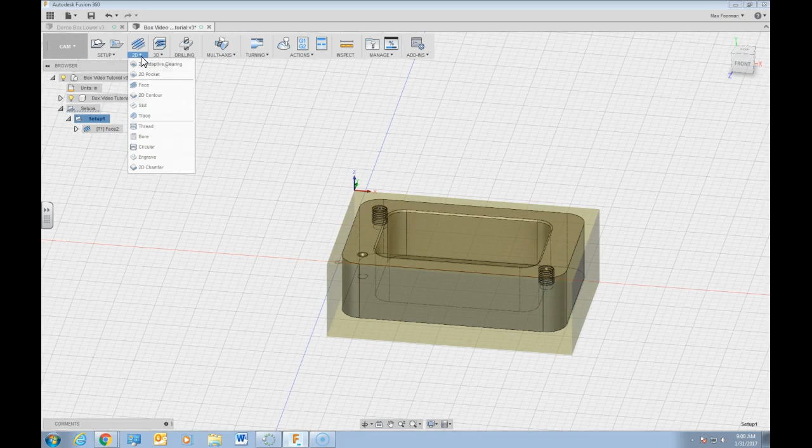Alright, now we have created a facing toolpath, and you'll notice that it showed up here underneath the setup. We're now going to start removing more material away from this part.

So we're going to do a 2D adaptive clearing, and this is what's called, or intended to be, a roughing cycle. It's just focused on getting as much material off of the part as possible in the least amount of time, not necessarily in how nicely it does it.

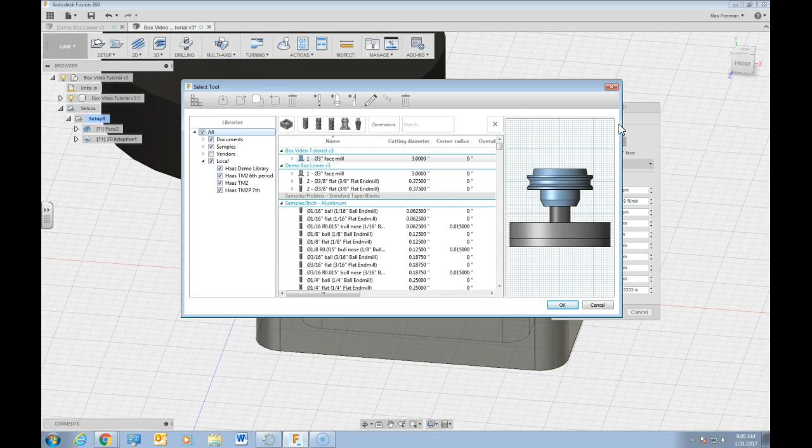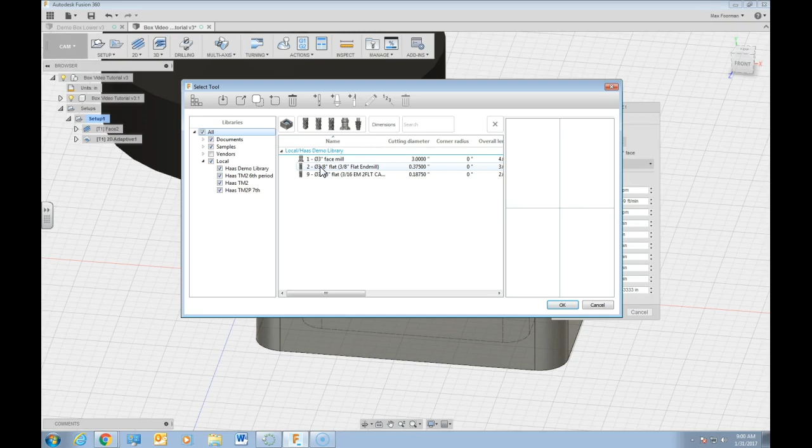So what I did there was click on the tool selection, because the 3-inch face mill we used in the last operation isn't right for this. We want to select, coming into the tool library I had set up before, this 3/8 inch diameter flat end mill. Clicking on that, say OK. Notice that some of these values changed that were tied directly to the tool.

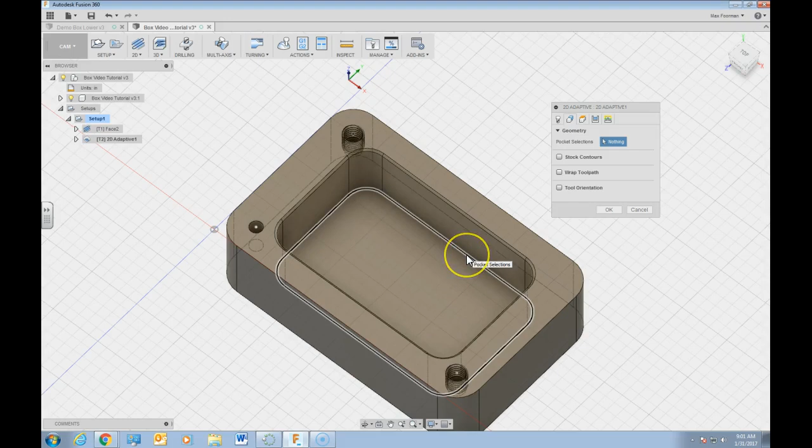Now, under this 2D adaptive material removal operation, we're going to have to go over to the Geometry tab. We're going to have to be very careful on what we select here, because I'm going to select the lower contour of this pocket.

We'll see this red arrow come up and select. We could try it some different ways and see what happens, but for now that's what we want to select. Now, we're not going to need to do anything here.

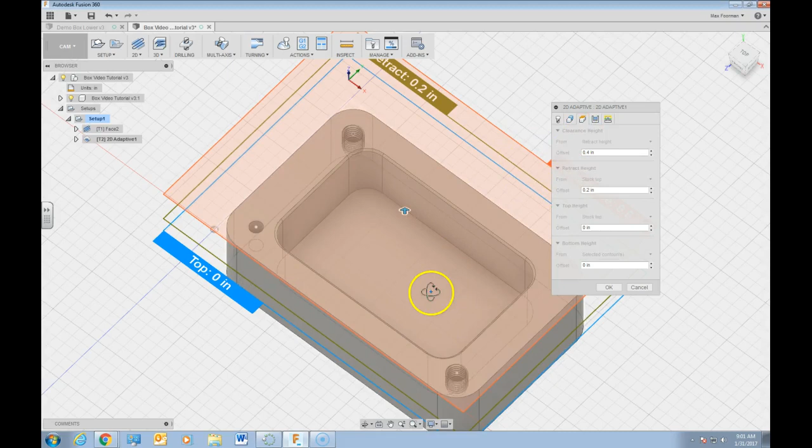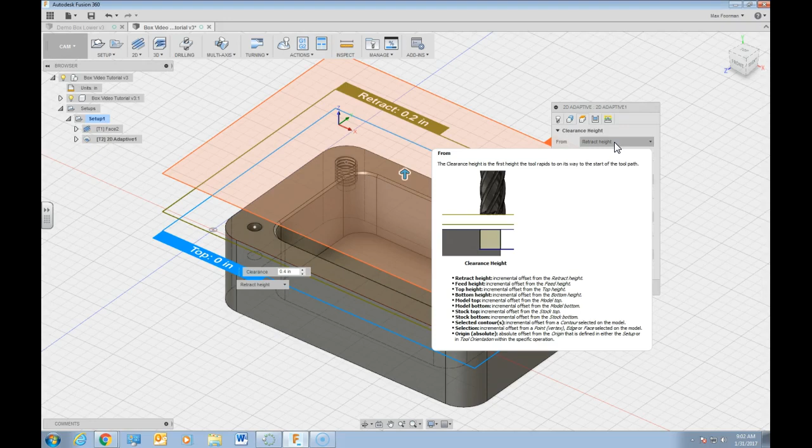One thing I want to show you in Fusion 360: if you don't know what a particular thing does, you can hover over it. When I hover over this offset dialog box, it says the clearance height offset is applied and is relative to the clearance height selection in the above drop down list. If you hover over it, it gives you an actual graphic description and readout of what this does. That's a helpful tip for Fusion 360 in general.

For now, the most important thing is the bottom height. That's going to be how deep this is going to go. What we really want, in terms of the depth, so the computer knows how deep to calculate to go, is going to be from that thing we just selected.

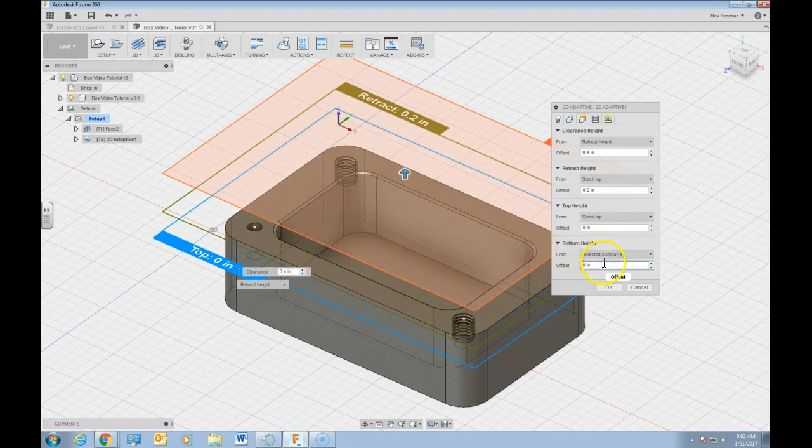So I like that right there. We can modify that if we want to, but in this case I'm good. We're good, so here we go.

We've got these other passes here, which is going to be another important thing. We're going to leave it as it is right now, but we'll come back and show what changing some of these things does. Radial stock to leave is going to be something important to look at for later, and axial stock to leave, 20 thousandths and 20 thousandths. So those are helpful to see later.

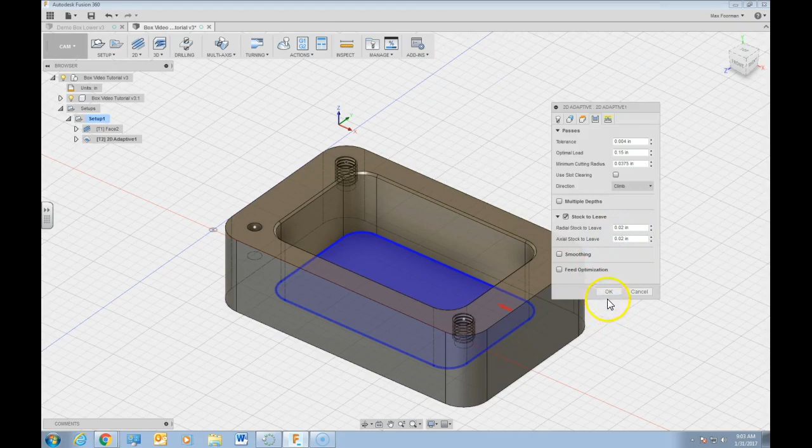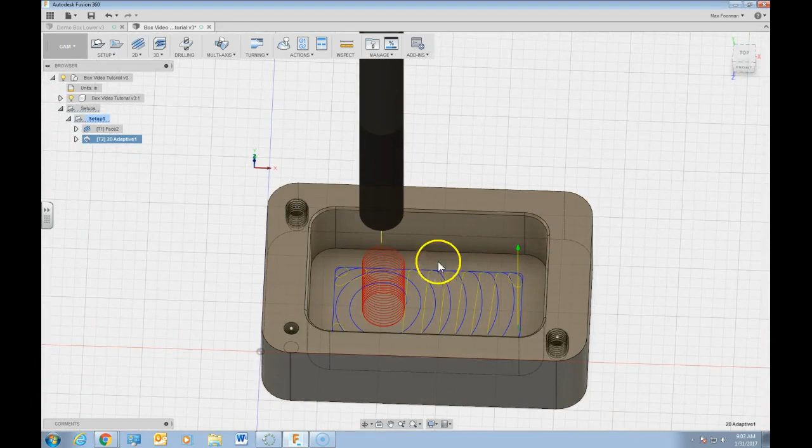But if I don't change anything else, just leaving these default things in place, and click OK, if we selected the right geometry here, we're going to be successful, and it's going to calculate for us here an actual toolpath. So this is designed to come in and remove all this material and get it out of there.

So again, if we come back, we could either select these. What I'm doing right here is coming back over to this panel, clicking and holding down the Shift key, and I've now highlighted both of those toolpath operations. You can see over here, that's the one we just created.

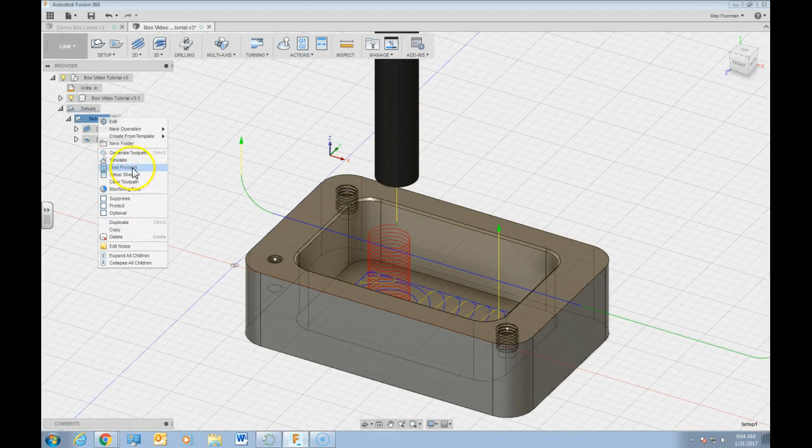You could then either come up here to click on Simulate, or right click on them like we did before and go Simulate, or if you want to simulate an entire setup, everything in it, you can come down here and click Simulate. All the same way of doing the same thing.

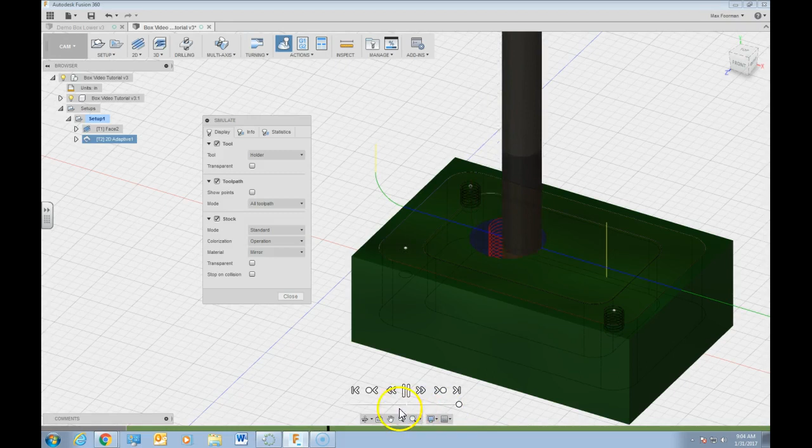So here we go. If we do this now, got stock is on, and if I simulate, now that was the facing cycle. This here now is actually coming down and starting to remove the pocket. If you want to make this move faster, we can move that slider up. And this is just showing how it's going to remove all the material away from that pocket.

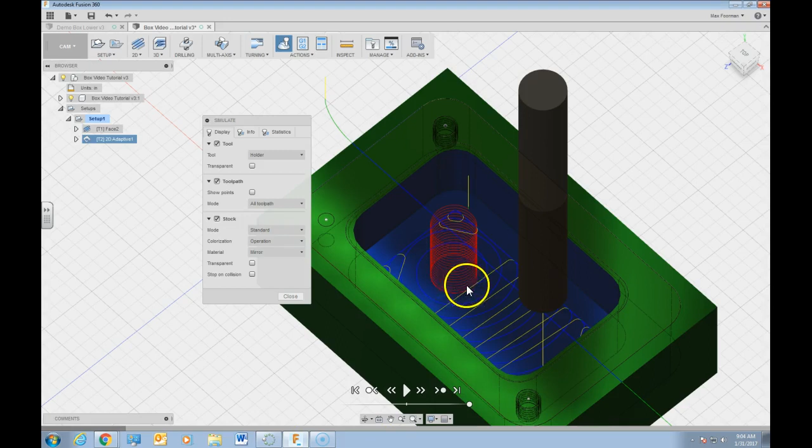So things to notice here is that this is doing what's called a helical interpolation ramp all the way down to the very bottom of the part, or at least to within 20 thousandths of an inch axially of the bottommost thing that we selected, and then it's going to work its way all the way around this pocket at full depth down here, which is cool.

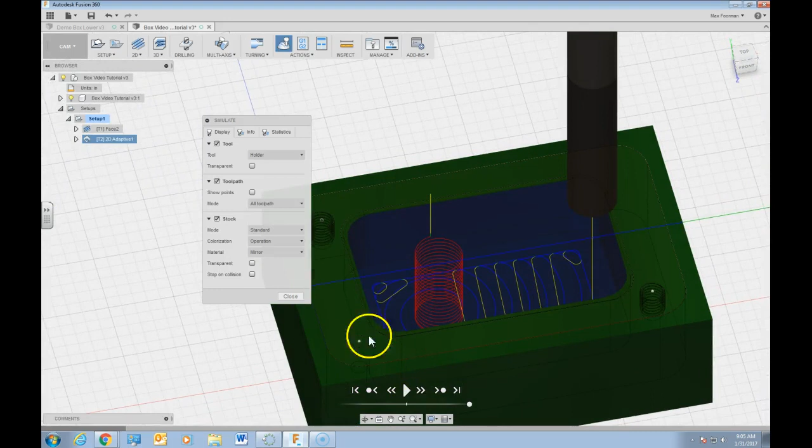Our machine might be able to handle that, but what I want you to see is that if I click close here, if I were to decide that might be a little bit more aggressive than what I really want right now, you can come by right-clicking on the tool operation here.

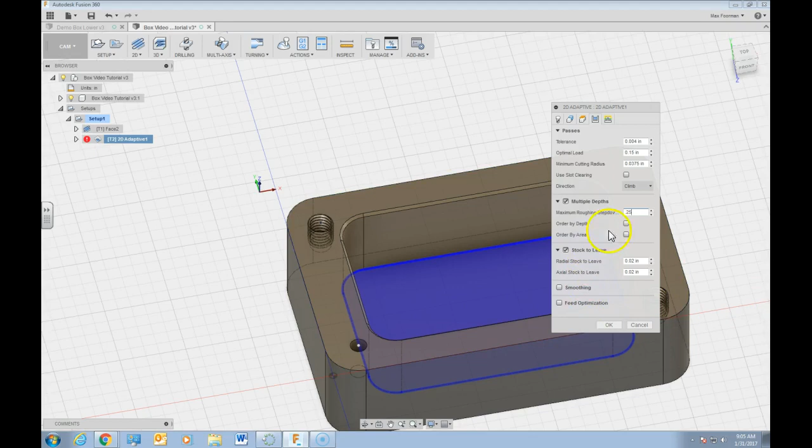We can come to this edit icon, and now if we come back over here to passes, we can click on this icon for multiple depths, and then let's change this value to, I don't know, 1/4 of an inch. And then leaving everything else the same, I'm going to click OK.

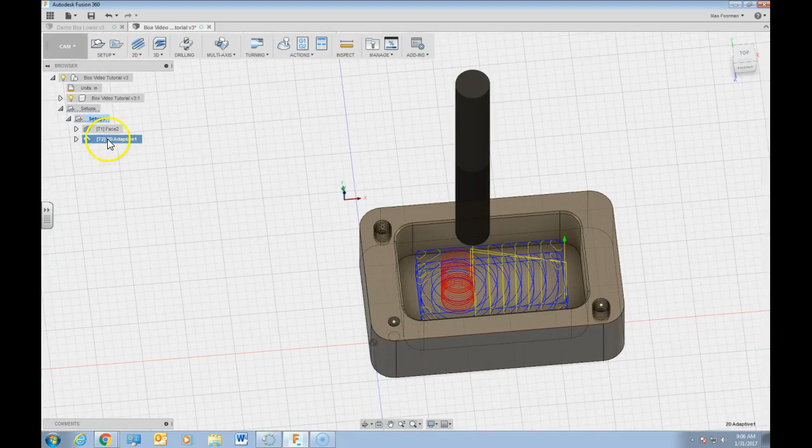And now we can see what this does. Now it is taking effectively 3 different step downs, and only the most it's going to go is 1/4 of an inch at a time in terms of depth. But with that then, we have now at least reduced some of the load on the tool.

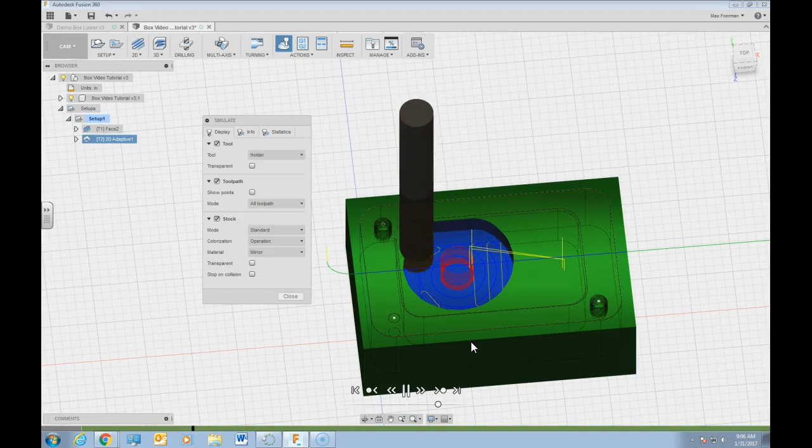If our machine can handle it, that's going to get much more in depth later, learning more how to optimize a tool path. But for at least right now, this way we can know that we're actually going to be able to remove material and not have too much tool deflection or anything else, and that's getting a little more complex. But I'm comfortable with the fact that the machine we have is going to be able to compensate or handle this actual tool path.

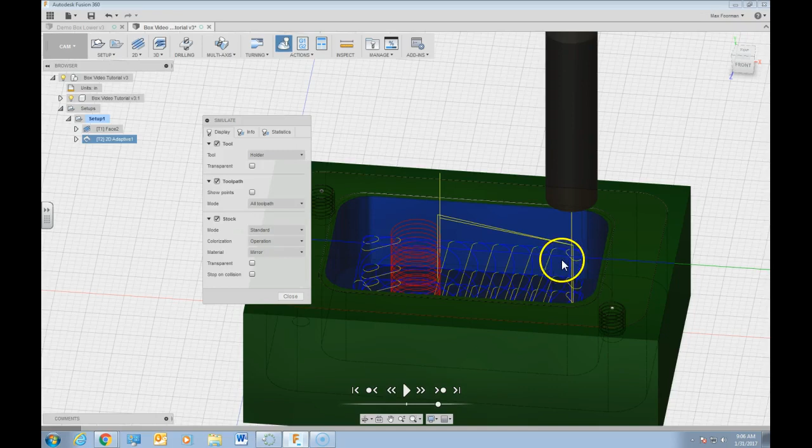Now it can jump ahead to the next operation. It's going to go through all the way. It's just now stepping down. But the thing to notice here also is that we had left that stock to leave box checked.

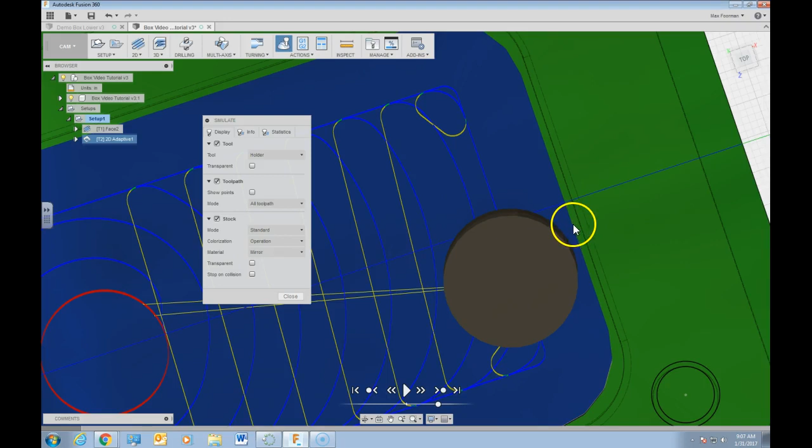Now if you look up top here, you can see that that right there is what I would call the finished wall of the pocket. And this tool, in this operation, is actually leaving stock, what is called radially there. And it has actually left material 20 thousandths of an inch on the floor of the pocket as well. So that's what we want in this case, because this is a roughing operation.

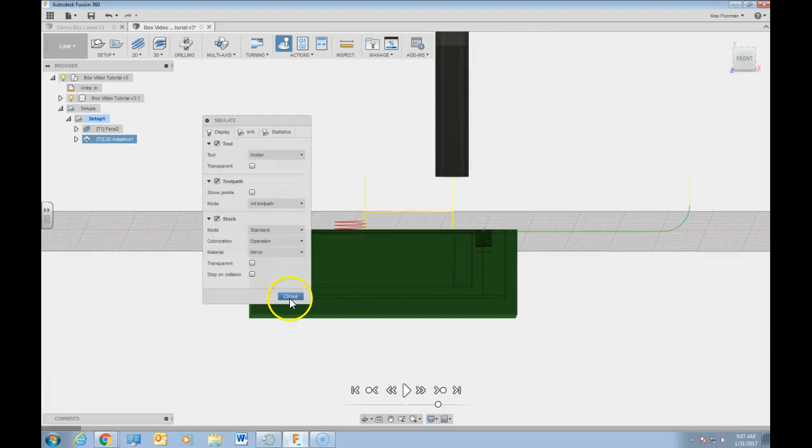But we'll take one more very quickly here just to finish out. So using another 2D adaptive toolpath, we can do another toolpath to remove material around the outside there. So what I just did, using the same tool, that 3/8 diameter flat end mill geometry, selecting the outermost contour there, heights and everything's okay. And again, stock there, I'm going to leave multiple depths off. I'm going to click OK.

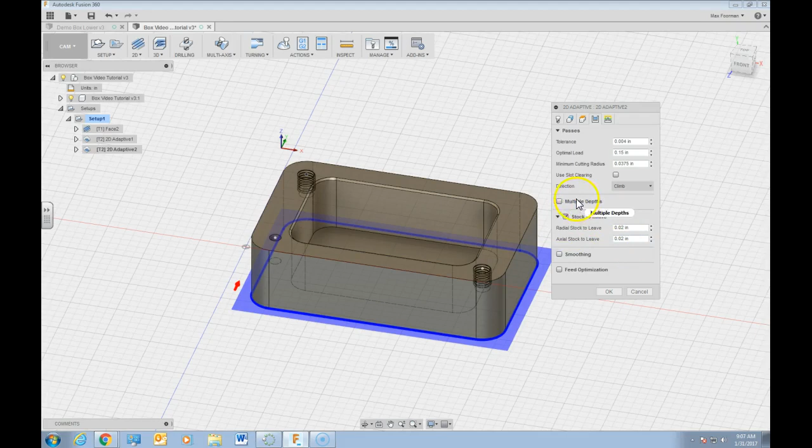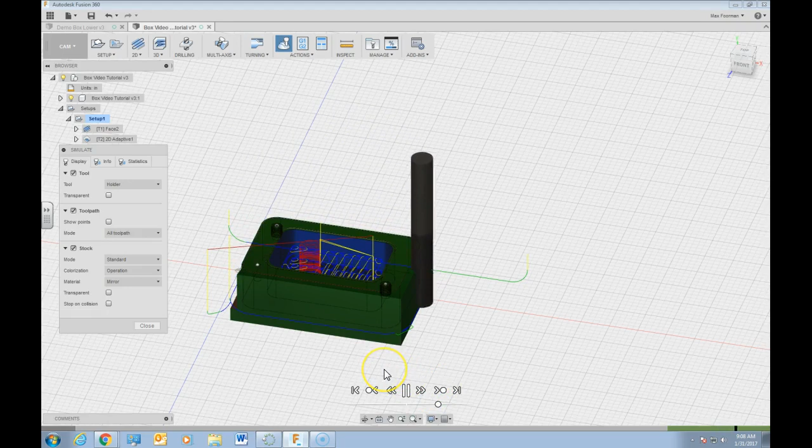We now have created, I'm going to jump to the next tool, so we're comfortable with the fact that it's pocketing all the way through. Jump to the next operation. It's coming around the outside at full depth. It's now roughing all that material around, and that is 2D adaptive clearing. We've just now cleared out this pocket and the outermost profile. Roughed those out.